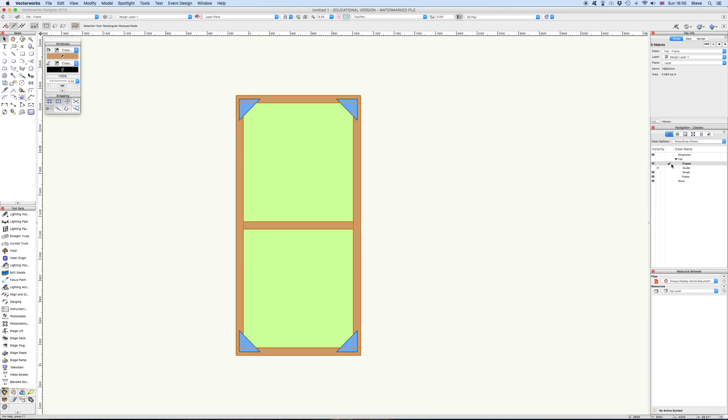Then I'm going to go to Model, Extrude, and I'm going to extrude the frame by 25 millimeters. That's that done.

Then I'm going to go to the plates. Again, put a little tick down there. Click anywhere to deselect everything, then draw a big box around there, and only the 4 plates are selected. I'll go to Model, Extrude, and extrude those by 6 millimeters.

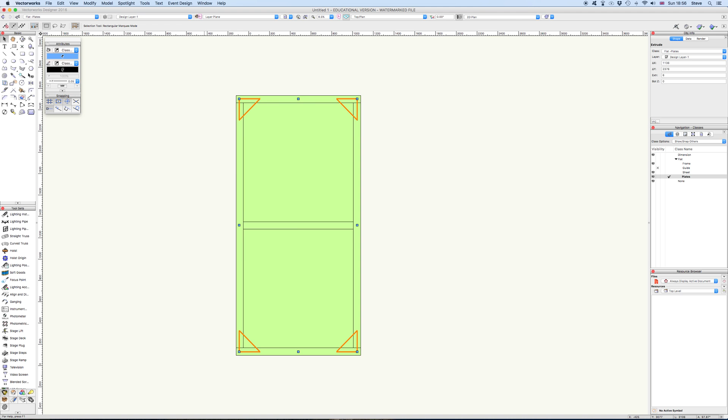Again, click somewhere else, and if the colors are going from your drawing, that's a good thing. And the last one is the sheet, which again, if I click on there, as long as I've only selected the things in that class, then just draw around it, and I've only got one rectangle, which I'm going to Model, extrude 4 millimeters. So that's the converting to 3D done.

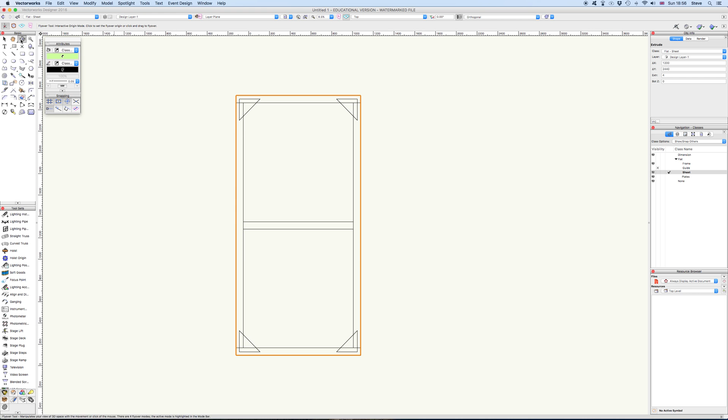I'll just do a little spin around that just now, and it is a 3D object. I haven't done that very well - it's better doing this just to let you see how I've done it, but everything is inside each other. The plates are sitting on the floor, the frame's sitting on the floor, and the sheet's sitting on the floor, so not particularly useful.

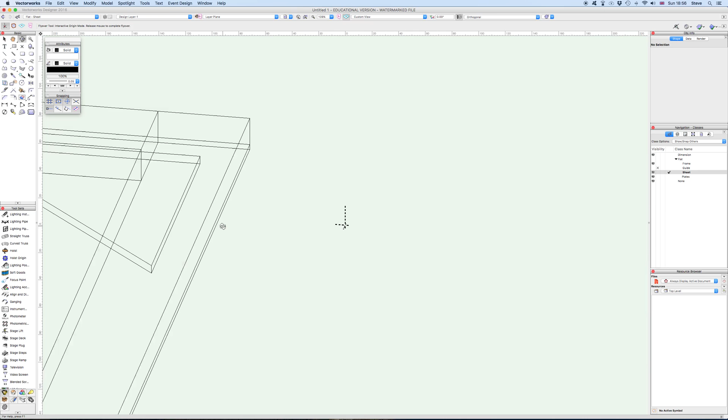Go back to top plan again. I need to have a little think about what I'm doing here. If you understand how theatrical flats are made, this is lying on the workshop floor and we're looking down on it. The bottommost object is the sheet, which, now that it's a 3D object, has a Z value. Z is the 3D axis coming straight out of the screen. So it's sitting on 0, it's sitting on the floor, which is defined as 0.

That's fine. The frame needs to be sitting on top of the sheet. So we know that the sheet is 4 millimeters. So if I change the bottom of the frame to 4, it'll start at 4 millimeters and come towards me, if that makes sense, sitting on the sheet.

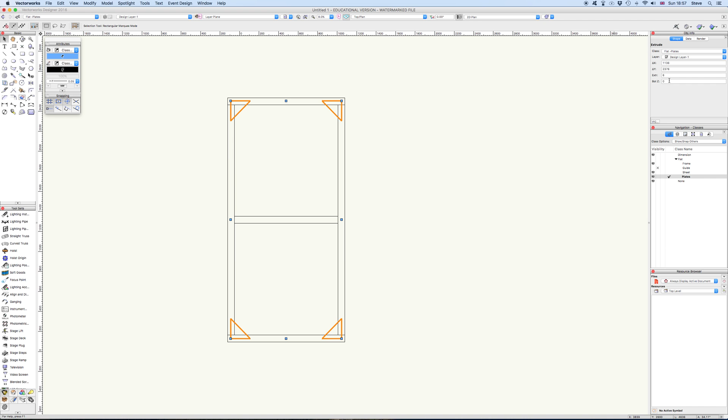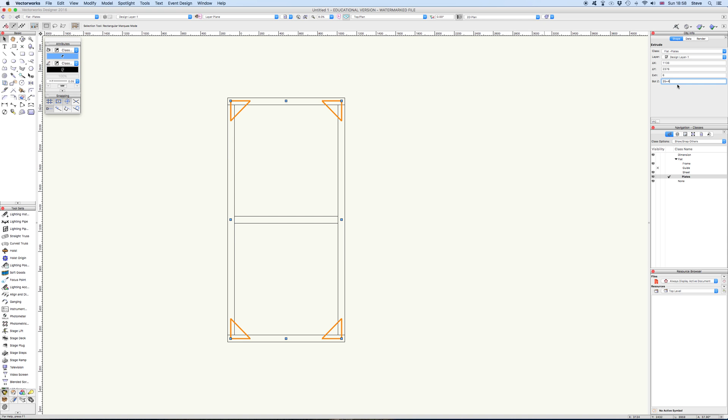And the last thing, if I go back to the plates, it should be sitting on the frame, which is 25 millimeters, because we defined that - we extruded it with 25 plus the 4 millimeters of the sheet. So it's got the sheet, then the frame, and the plate sits on top of that. You could probably work out 25 plus 4, but if you can't, you can just type it in the box there, and it'll do 29.

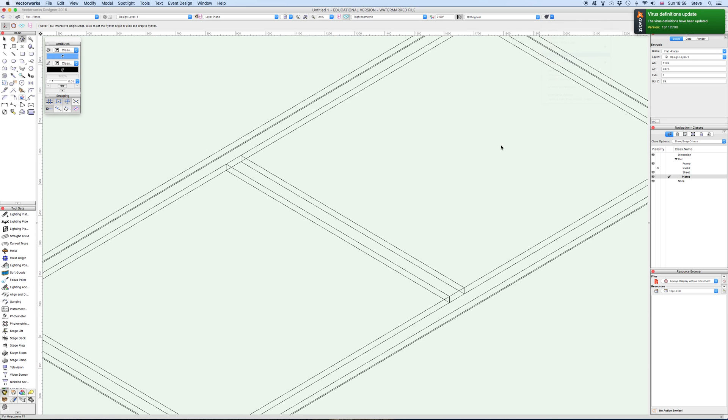So now, when we spin this round, we can see that the plates sit on top of the frame, which sits on top of the sheet. If I go to a front view, you can see it clearly there. Go to an isometric view, go to the OpenGL render, and there we go - there's a flat there with everything sitting where it's supposed to be.